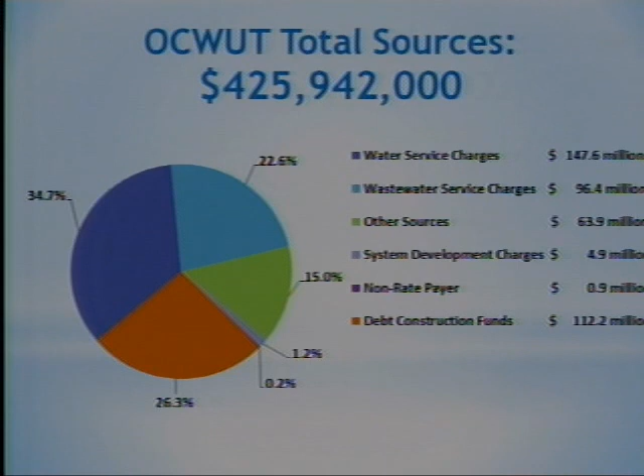Mr. Chairman and trustees, starting on the page about total sources, you'll notice that the primary source of funding is the water and sewer revenues for providing water and sewer service. Under other sources, we have $63.9 million, of which $58 million is use of cash reserves. The debt construction funds are $112.2 million, $90 million of that is water.

However, per the ETC survey the city performed in 2016, customer satisfaction decreased from 70% in 2013 to 58% in 2016. Therefore, our proposed budget includes technology for innovation enhancements and certain key position additions targeted to improve that customer satisfaction rating.

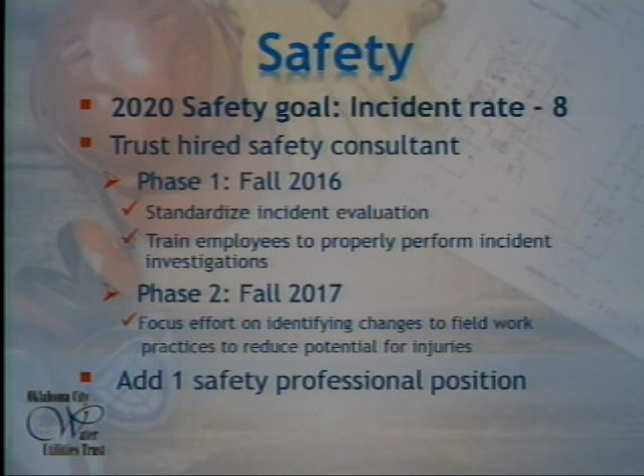One of the projects approved was to improve the security of our SCADA systems as we work to manage and monitor system performance for our water and wastewater system.

We are moving to an enterprise application for SCADA, and we've installed that new enterprise SCADA application in the city's IT data centers. In order for them to maintain those new servers and the network security that goes along with that, they needed additional personnel. So we're proposing to fund 4 positions in the IT department to perform the server and network security activities needed to support a more secure, robust SCADA application.

Once we implement the phases already approved in the water system, we'll come back with another phase to work on the wastewater treatment facilities.

Under the asset management program, we're proposing adding 1 civil engineer 3 to initiate the beginning activities of asset management and condition assessment work on the sewer system.

On sludge handling facilities, we've historically used lime and polymer to take the dirt out of the water, which creates lime sludge or water sludge. That goes into pits and lagoons, and we hire companies to extract the sludge, dry it, and haul it off. Over time, as the system grew and the plants were upgraded, we got to a point where we're now producing too much sludge for the size of the lagoons we have.

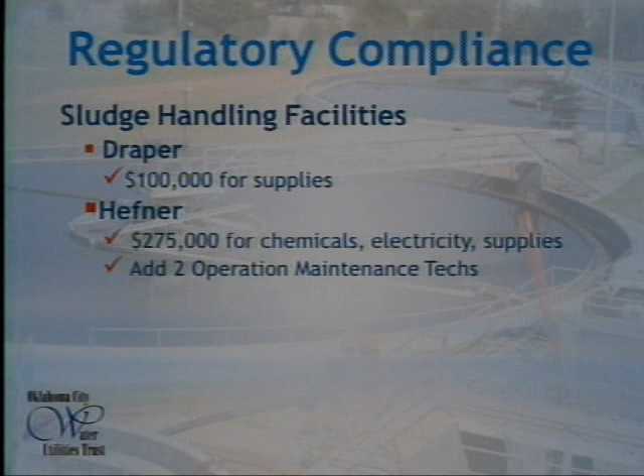An engineering study was performed for each facility, and it was determined the most efficient, effective way forward was to build facilities to dewater that sludge so it could be handled more efficiently. Those facilities are coming online shortly, and we need supplies at Draper, chemicals and electricity funding at Hefner, and 2 operation maintenance techs at Hefner.

Secondly, we need to do a better job locating call-in locates for our water and wastewater system. By locating all of those, we'll have less interruption of service, since someone will be less likely to hit a line if we've located all of our lines. We're proposing to add an engineering aide to help sort those and get them to the field people so they can do their job more efficiently.

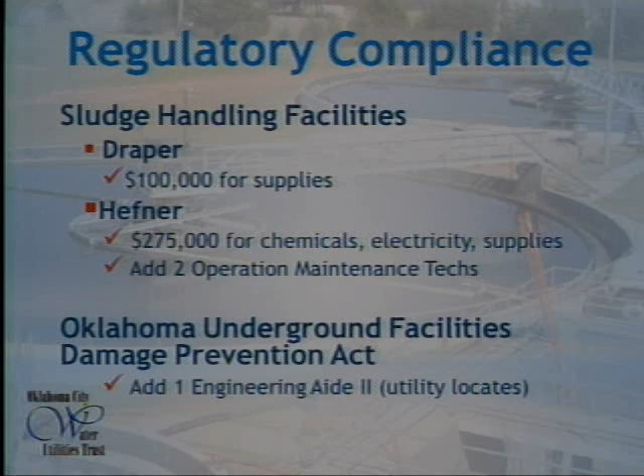One of our initiatives last year was to solicit a new contract for wastewater plant operations, entering a new contract with Severn Trent. As part of that process, our consultant CDM worked with us to identify improved ways of monitoring and managing that contract so we'd have better maintained facilities and better service.

To do that, we need additional staff because we have 5 facilities and wastewater sludge applied throughout farmland across the metro area. The distances make it impossible for one person to travel everywhere and do the job well we want, so we're proposing to add an additional person so we can split responsibilities between 2 people who can be on site more often.

Another initiative is that we are now up to 1,760 restaurants that we monitor for fats, oils, and grease, and we have 2 people handling all the industrial waste and commercial activities. We need someone that can focus just on restaurants, apartment complexes, and institutions so we can do a better job, resulting in fewer stoppages, and so they understand the program better if we interface with them more often.

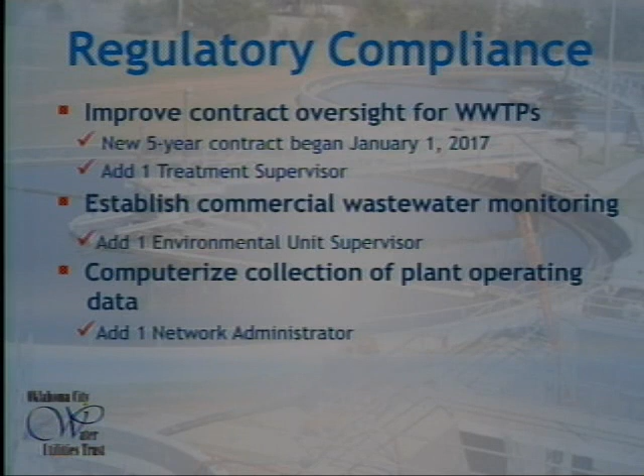Third, we have been collecting our plant operating data manually, and we want to propose going to a cloud-based application for both the water and wastewater systems so we can have real-time access to that information, do plant comparison data with appropriate security by management, and in an automated way prepare our reports to DEQ on a monthly basis.

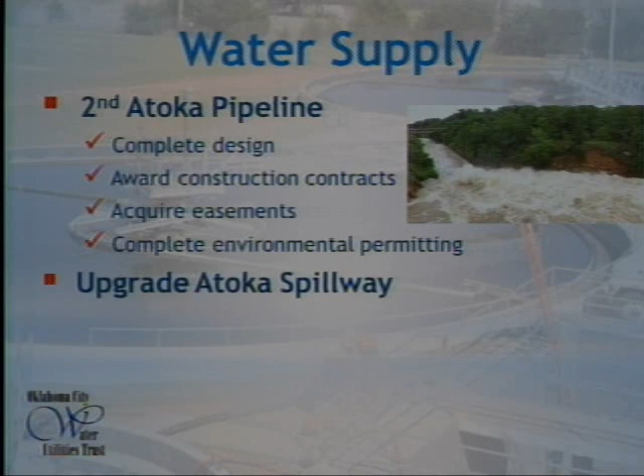The Atoka Pump Station, located just next to that spillway, is one of the most important facilities we have, so this will provide tremendous added protection for our facilities there.

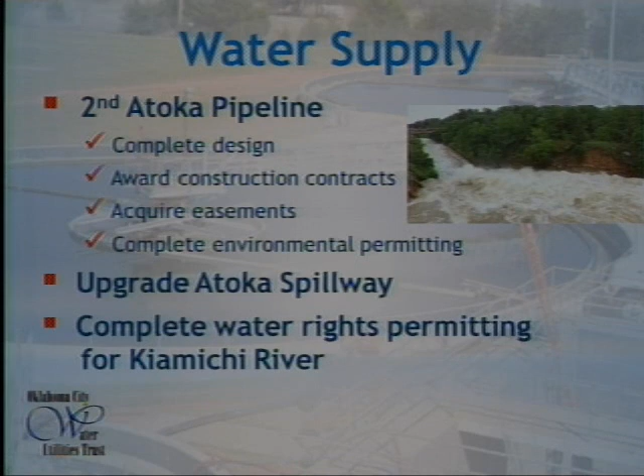Also in this water supply initiative, we're pursuing acquisition of water right permits for bringing water from the Kiamichi River Basin, which Sardis Lake releases into. That process has already begun by OWRB, and hopefully that will be finished up by the end of the year, we hope.

The Atoka pipeline is about 100 miles, and it's the biggest part of our capital plan.

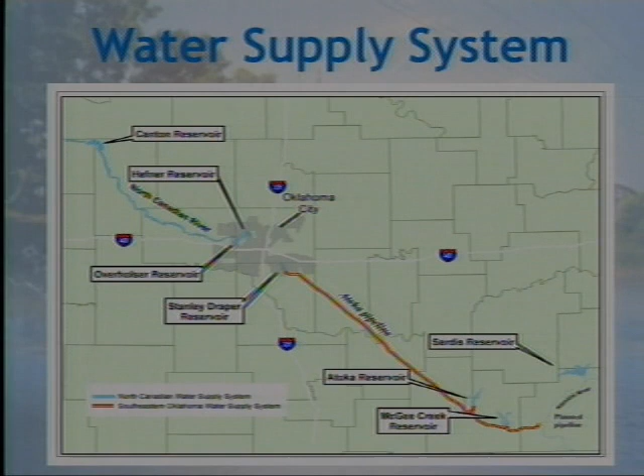In terms of meeting system reliability and resiliency initiatives, we have a number of initiatives we're pursuing. As everyone knows, the Draper Water Treatment Plant is the workhorse of our water system here in delivering water to customers. Some of the existing clear wells are a little old and close to the end of their useful life, and we also need to add additional clear well capacity to the plant. So the first project is to make sure that happens within this capital plan.

The next one we're pursuing, new for us, is developing and implementing a new asset management program. Instead of going based on events that happen, we're switching over to assessing all of our infrastructure and methodically evaluating what you have, how much life is left in it, and what the consequence of failure would be if any of those things happen. Based on that system, we'll have a much better way of developing our capital plan and employing the right techniques for fixing these issues.

We're starting that project this year with the staffing that Brett talked about. In this capital plan, we're also heavily starting the sewer side of this asset management program, beginning with condition assessment of all of those things, and making sure that the inventory of what we have is in place.

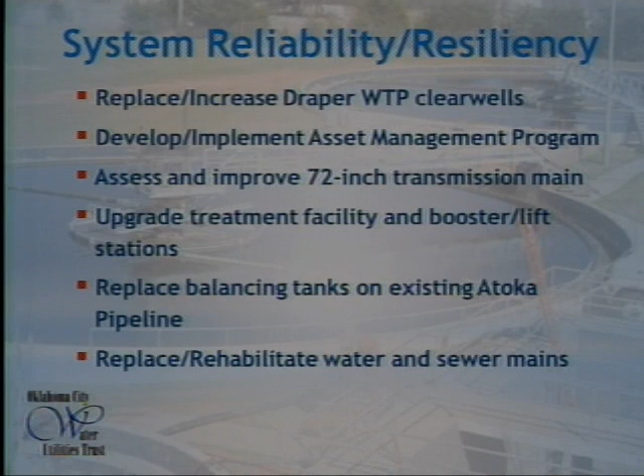In terms of resiliency, this is one of the most important things we have and want to continue with - the interconnect project. That's connecting the service areas of Hefner Water Treatment Plant and the Draper Water Treatment Plant so we can serve either way, going from south to north and north to south. It provides a tremendous amount of resiliency for us, even if we have a major failure at one of the treatment plants - this allows us to keep serving those areas.

We also have an initiative of completing transmission lines to make sure water goes out to the west part of Oklahoma City. That's on the water side.

On the wastewater side, we also want to make sure our system is really resilient, especially when we have a lot of rainfall. We want to make sure it doesn't overflow back into people's houses and doesn't have illegal discharges. So what we're embarking on is a wet weather capacity analysis to see the best way to handle this - when the water gets to the plant, do you want to treat it a special way or store it someplace? What is the best mechanism to do that? This will look at all the wastewater treatment plants and provide recommendations to proceed after that.

Along with making sure we have enough capacity in our collection system on the wastewater side, we're also proposing to build a relief line, especially down in the North Canadian Basin.

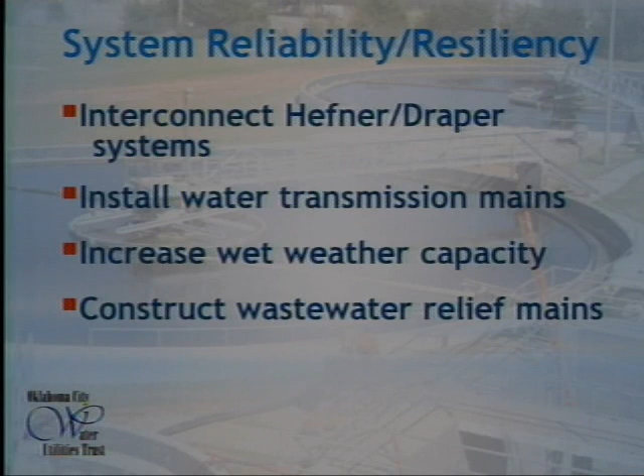The other initiative we're pursuing is regulatory compliance. This is high on our plate to make sure we're meeting our goals. Some of those wastewater relief lines I just talked about in North Canadian and south of Oklahoma City are really tied into the consent order we have with the Oklahoma Department of Environmental Quality, and we are required to meet those relief main projects. These are all tied in with the consent order.

The treatment facilities - South Canadian is currently about 5 million gallons a day average, with capacity of about 6. We plan to expand it. But the treatment requirement has changed quite a bit, much more stringent than it used to be. Because of that, we have to find another discharge point so we can discharge the water, the sewage, into the river after it's completely treated.

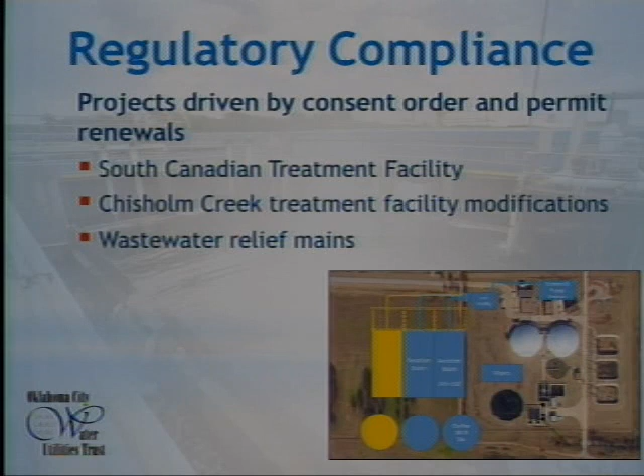Then there's also Chisholm Creek - we have issues with disinfection byproduct, so we have to modify the plant a little bit to accomplish that as well.

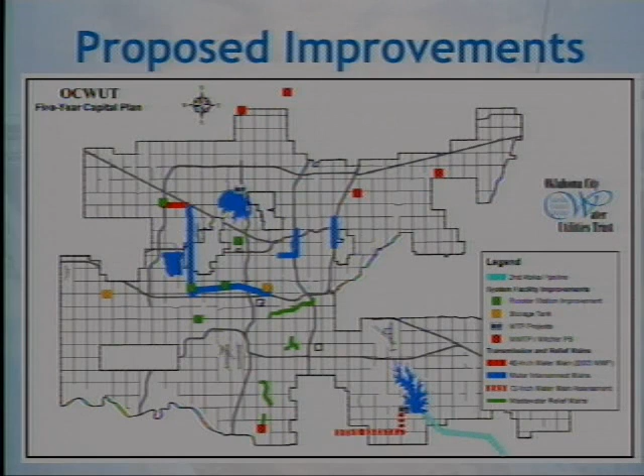And the thick blue lines that you see on that slide are the interconnect projects. There's 2 sides to it, one to the west side and one to the east side. All of those projects are already under contract. We have engineers working on those projects, so in this capital plan we'll deal with completion of all of those.

You mentioned under resiliency the ability to flex between south and north, southeast and northwest - is that by physically connecting those 2 systems? Is that represented on this map? That's correct. On the west side you see there's green little squares - those are the booster stations that connect both sides and pump from one side to the other. So that's the water we're moving - it's not raw, it's treated water. All treated water.

That brings me to the end, and I'll be more than happy to answer any questions you might have. Are there any questions?

I think it's incumbent to point out that we're probably going to have to be doing a rate increase coming through - we do one almost every year, and it isn't probably, it's something that's going to be coming forth in the next few months. As long as we do it in a timely fashion, we can minimize the impact on an annual basis. Overall our rates are still pretty modest, but there's going to be some rate increases over the next few years.